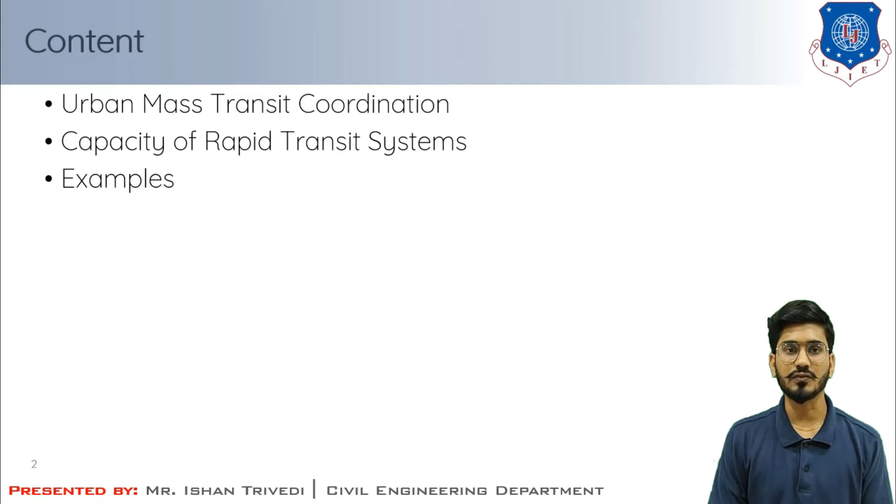Inclusive of these two theories, I am adding the example of capacity of rapid transit system. So let us first understand what is urban mass transit coordination. Coordination means pooling the transportation resources and the activities of several human services agencies with one another or with the mass transit operation in order to achieve various benefits.

Mass transit authorities often define coordination in terms of their authority to regulate various modes of transport, for example rail, taxi, and bus transit in a given community or geographical area. The transit planner may focus on defining and redefining routes and schedules based on the integration of this transit coordination.

In metropolitan planning organizations, these are the agencies responsible for long term and short term regional transport planning, and may be interested in how several travel modes such as highways and transit can work better together. Coordination is one management strategy for improving the performance of transportation services and increasing overall mobility by removing inefficiency from disparate operations and service patterns.

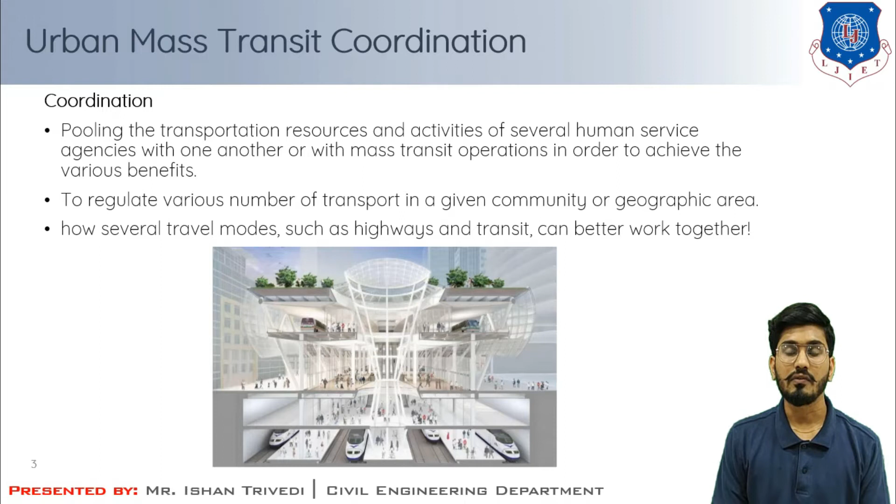So there are some benefits of coordination. The potential benefits of coordination among transportation providers includes more resources applied to transportation, more cost effective use of those resources, expanded services, more trips taken, and lower cost to the customer. As there is saving in cost for some participating agencies, there is more centralized management which improves service quality and greater emphasis on safety and customer services, available through flexible payment with a single payment for all different modes of transportation, and at last there are more service options.

Coordination is one of several transportation management or problem solving tools where the aim is to determine whether transportation services in a particular locality can be improved. The transportation planner must first gather data about the potential population to receive transportation services and the current transportation providers, and based on that there will be coordination of different modes of transportation. Then they must analyze the effectiveness and efficiency of current services in meeting the target population's needs.

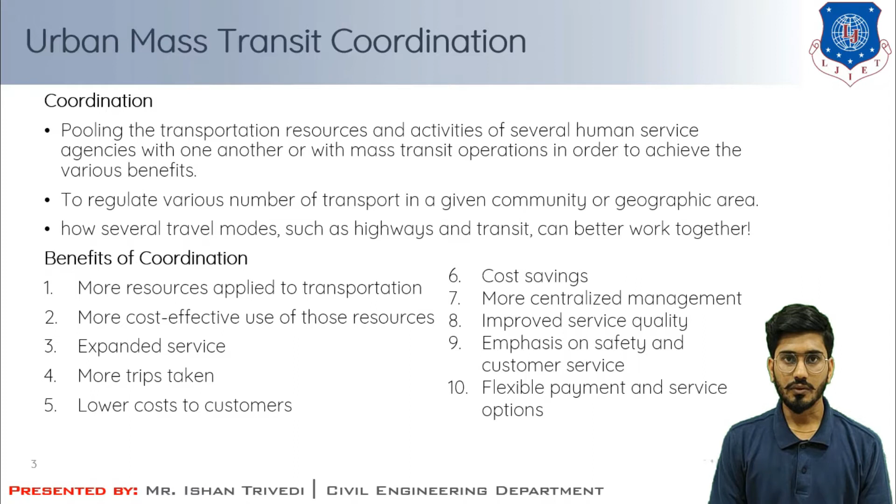So in that context, particularly the coordination in mass transit requires certain things, for example fare coordination, where coordination of ticketing arrangement and fare structure is considered. Then service schedule coordination, where coordination of vehicle schedules facilitates the transfer. These schedules are planned in such a way that there will be lesser waiting time for the bus or any mass transit service.

Then information coordination, by the joint distribution of service information by transit operators, where the schedule and interval frequency of any bus or mass transit system on a particular route is distributed and awareness is provided to people in general so that they can plan their trips according to the bus, mass transit, rail or metro services.

Then the facility or vehicle coordination. This includes the collective purchase of equipment, vehicles, and other resources on the part of transit agencies for the purpose of achieving economy of scale.

In modern metropolitan cities like Mumbai, Delhi, Kolkata, Chennai, the demand for mass transit has increased rapidly. Here both systems, the bus rapid transit system and the municipal bus system, play an important role in alleviating urban traffic congestion and pollution in urban areas.

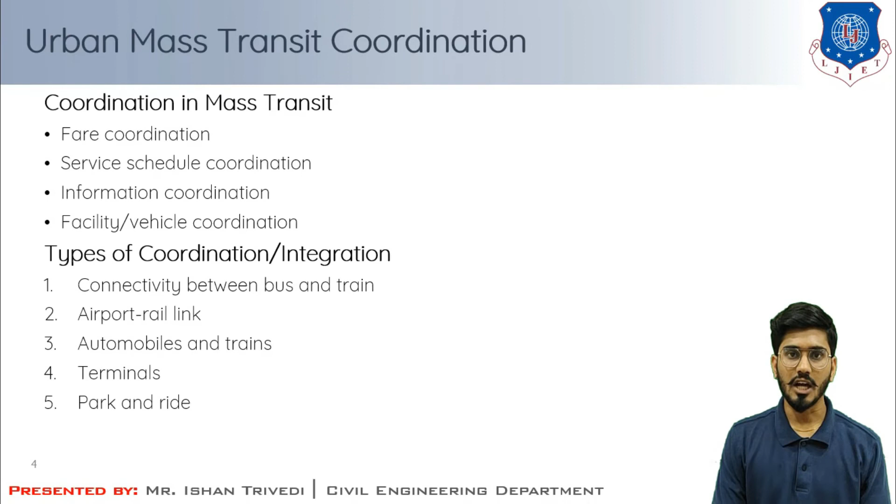Now I am moving towards the capacity of rapid transit system. Capacity of rapid transit system may be defined as the maximum number of passengers that the system can move across a point in a specified period of time. It is sometimes referred to as line capacity, and it is often measured as passengers per hour per direction, meaning pphpd.

There are several terms for finding the capacity of a rapid transit system. First is the time headway, denoted by h. It is the time interval between the passage of two successive vehicles moving in the same lane, measured from head to head as they pass a point on the road. Meaning, if I'm standing at a bus station and one bus passes at a particular time, then the next successive bus on that route passes, that is the time headway. It is expressed in minutes.

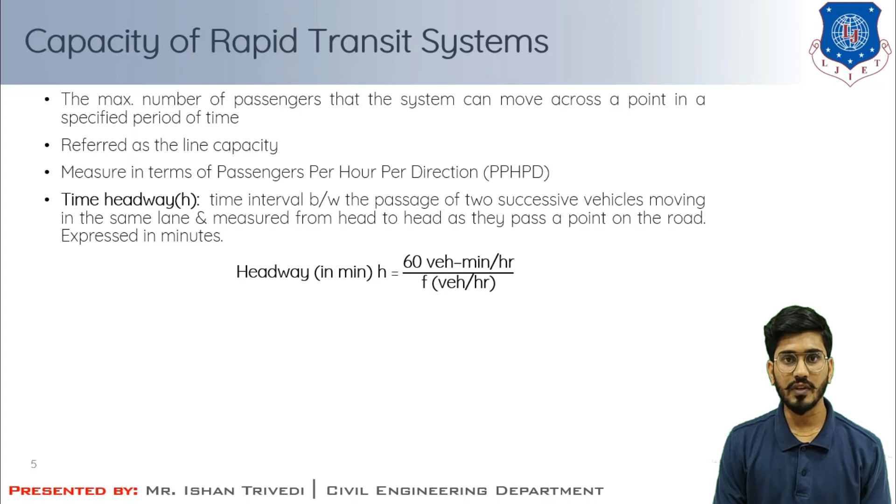The equation is: headway in minutes, h, equals 60 vehicle-minutes per hour upon frequency, in terms of vehicle per hour. Here 60 is used because of the unit we referred to, that is hour. Next is frequency: the number of vehicles per unit time passing a certain point on the road. Frequency is denoted by F, in vehicles per hour, equal to 60 vehicle-minutes per hour upon H, the headway in minutes.

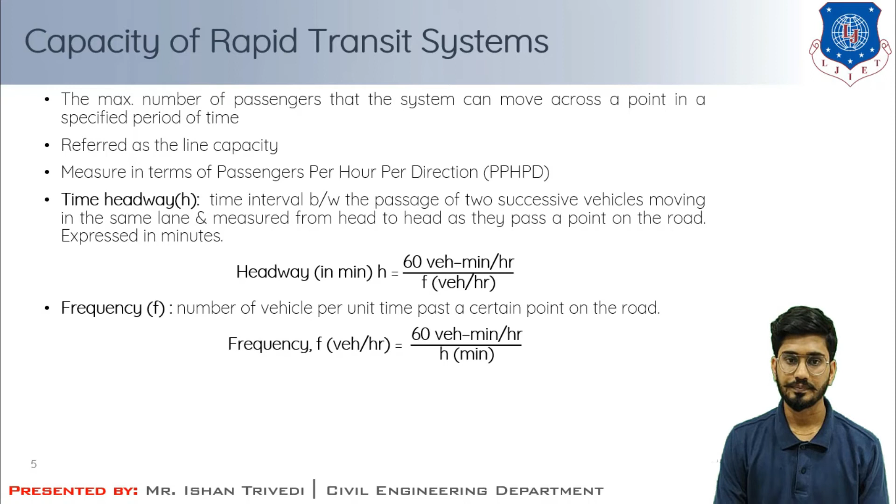Next definition is reliability, denoted by R. It is the percentage of vehicle arrivals with less than a fixed time deviation from the schedule. For example, if I'm waiting for a bus which arrives at the station at 10:30, and if it arrives exactly at 10:30, then the reliability is 100%. If it deviates from its schedule, then it will be less than 100%. This is how you can remember reliability.

Now we have transit capacity. It has two parts: vehicle capacity, denoted by CV, and passenger capacity, denoted by CP. Vehicle capacity is the maximum number of vehicles that pass a point on the road per hour. CV equals 60 upon H into R, in vehicles per hour, where H is the headway in minutes and R is the reliability in percentage fraction.

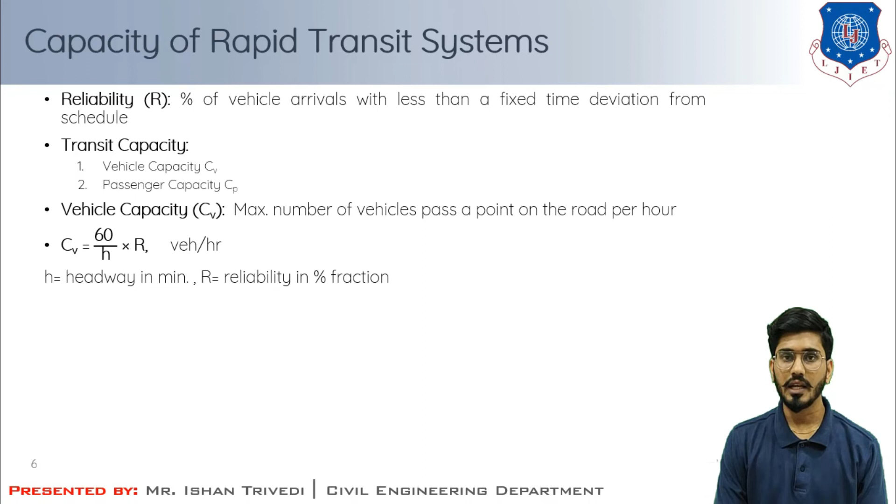Then the second term is the load factor, denoted by alpha. It is the passengers per bus capacity. Means if the capacity of bus is 60 and the passengers traveling in the bus are 65, then 65 upon 60 denotes the load factor, which is 1.08. This means if the load factor is greater than 1, the bus is running beyond its capacity level and the level of service is deteriorating.

Now the next term is the passenger capacity, denoted by Cp. It is the maximum number of passengers that the system can move across a point in 1 hour per direction. It is denoted by the equation Cp equals Cv into N into S into alpha. It is measured in persons per hour, where Cv is vehicle capacity, N is the number of vehicles, S is the seats available in that vehicle, and alpha is the load factor.

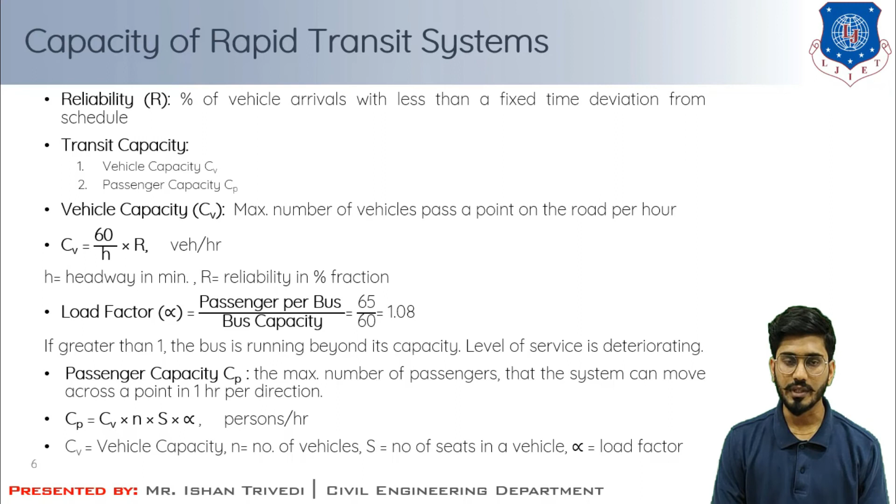Now, based on these terminologies, let us understand an example. First we will go through the problem statement, then we'll have the solution. Find the maximum capacity per hour of BRT and metro for the frequency of 60 trips per hour on any corridor. So first I have to find out the vehicle capacity, and based on that I'll find out the passenger capacity of BRT and metro individually.

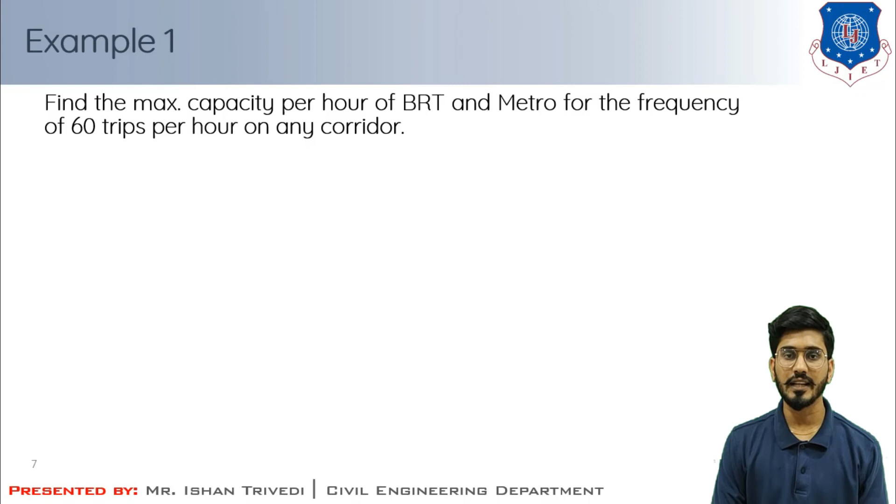Here some data is missing, so we need to assume certain data, and these will be at a certain time interval, so don't get confused regarding those values. First I have F, the frequency, which is 60 vehicles per hour. Now I'm assuming the reliability is 100%, and in fraction form that is 1.

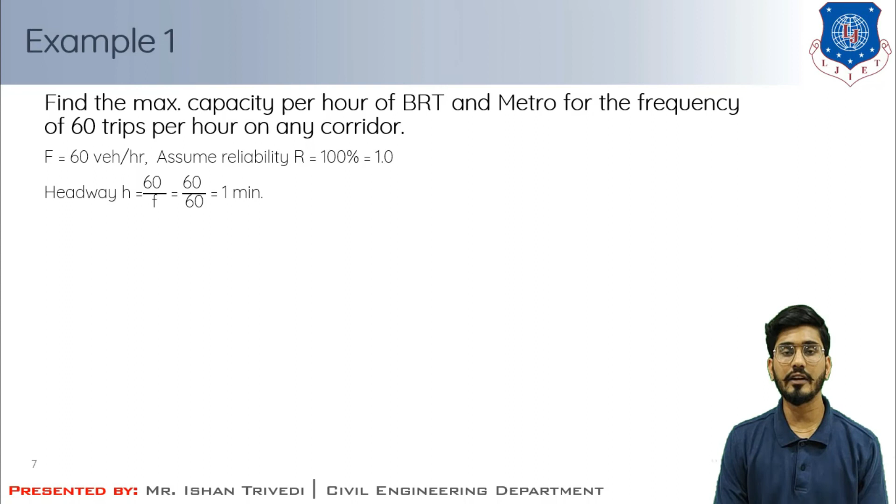Now the headway is equal to 60 upon frequency. Here 60 divided by 60, because the frequency is 60, and the headway of those buses or the metro is 1 minute. So each minute, one BRT and metro passes on their own corridor. Then the vehicle capacity Cv is equal to 60 upon H into R. Here 60 upon 1 into 1, where R is reliability 1 and H is headway 1. Again the answer is 60 vehicles per hour.

Now next is the maximum capacity of BRTS that they are carrying. Assuming the capacity of BRTS in terms of seat capacity, S is 50 and the load factor alpha is 1.10. Putting these into the equation for passenger capacity: Cp equals Cv into N into S into alpha, where Cv is 60, the number of buses N is 1, the seat capacity S is 50, and the load factor alpha is 1.10. So the total number of passengers traveling per hour is 3300 persons per hour.

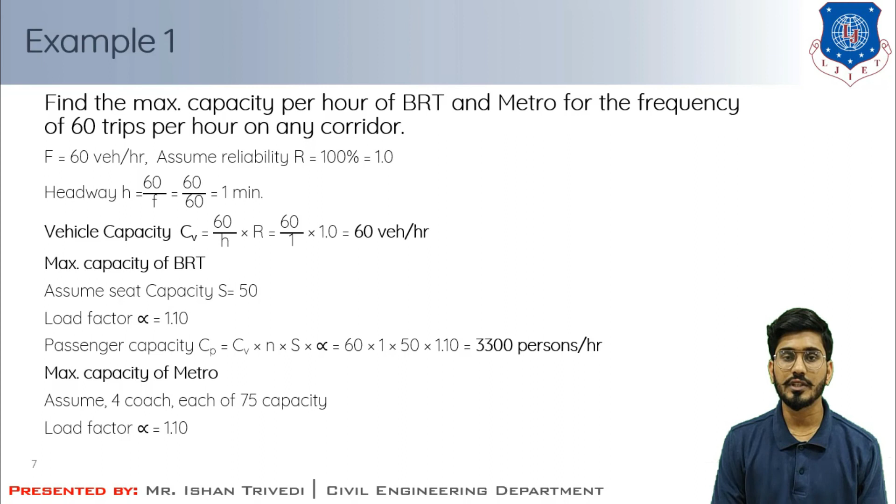Now similarly I'll compute for the metro. I am assuming the seat capacity of the metro: 4 coaches, and each coach consists of 75 seats. The load factor again is alpha 1.10. So the capacity of metro Cp equals Cv into N into S into alpha. Here 60 is our Cv value, number of coaches is 4, so I put 4 into the seat capacity of 75, and the load factor is 1.10. So the total number of passengers in a metro is 19,800 per hour.

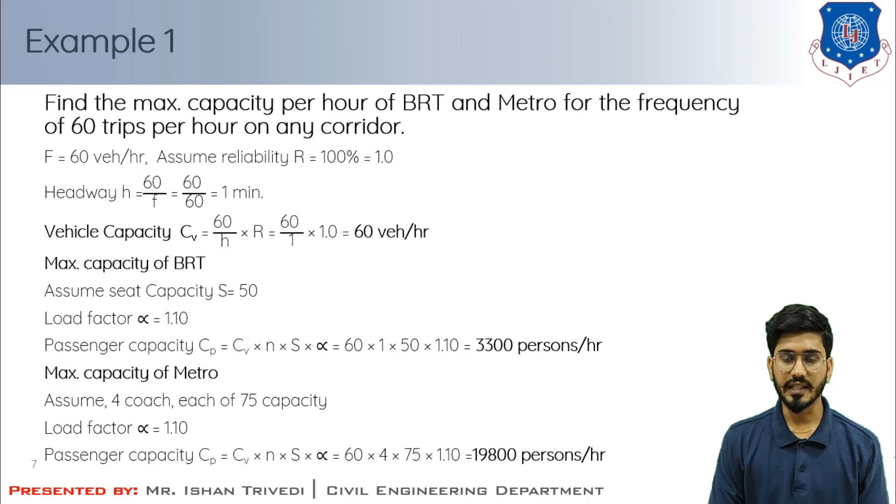Now understand the second problem. An existing transport corridor is to be converted into BRT having reliability of 85%. The seat capacity of the bus is 70 with permissible standing of 50%, and headway is 15 minutes. Calculate the vehicle capacity and passenger capacity of BRT. Here all the data required for computing the passenger capacity of the system is given.

Here the reliability is 85%, so it is 0.85. The headway H is equal to 15 minutes. So I'll put this in the equation: vehicle capacity Cv equals 60 upon H into R, meaning 60 upon 15 into 0.85, and the vehicle capacity is 3.4, meaning nearly 4 vehicles per hour.

Now I'll find out the capacity of BRT for carrying those passengers — passenger capacity of BRT. Here the data given is that the bus sitting capacity is 70, so S is 70. Now alpha has been given such that additional 50% people are standing in the system, so above 70 there are 50% more people standing. So here the load factor alpha is 1.50.

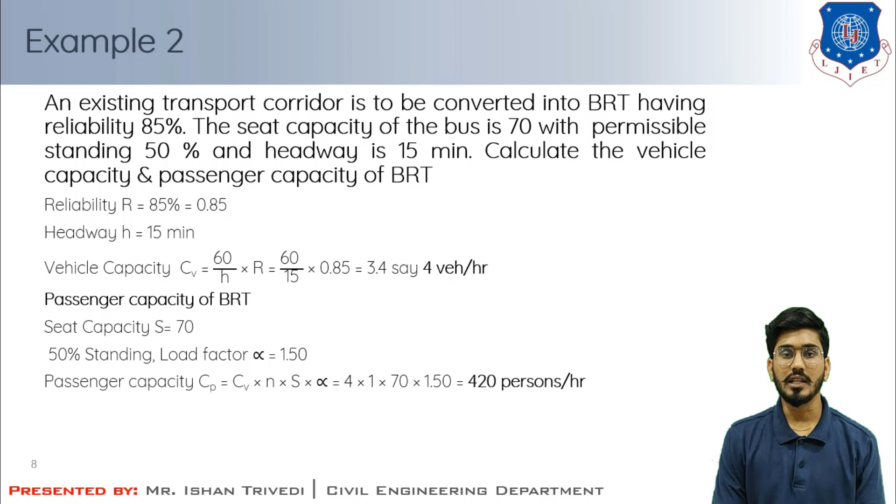Now the passenger capacity Cp is equal to Cv into N into alpha into S, where Cv is 4, S is 70, N is 1, and alpha is 1.5, giving a total of 420 persons per hour in that BRT. So I am ending this session here. I hope you have learned about urban mass transit and the capacity of rapid transit. Thanks for watching this video.